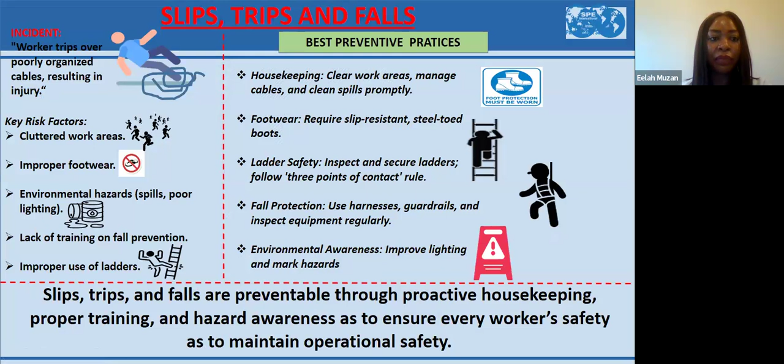As energy professionals, safety is in the forefront of all our activities, and continuing in that light, I'll be sharing a brief story that we could take some learning points from and integrate in our various workplaces to ensure that our safety is kept at the forefront. So I'll be discussing briefly an incident that happened on site.

A worker tripped over poorly organized cables, and this resulted in an injury. In response, an investigation was made to point out key causes of the fall and also to identify other key risk factors that could cause slips, trips, and falls while on site. It was pointed out that the slip could have been caused by cluttered work areas, improper footwear, or environmental hazards such as spills and poor lighting.

Also, from the investigation, it was pointed out that the incident could also be caused as a result of lack of training on fall prevention and improper use of ladders. After the investigation, some best preventive practices were put in place to take proactive steps to ensure no slip, trip, or fall happens again while on site.

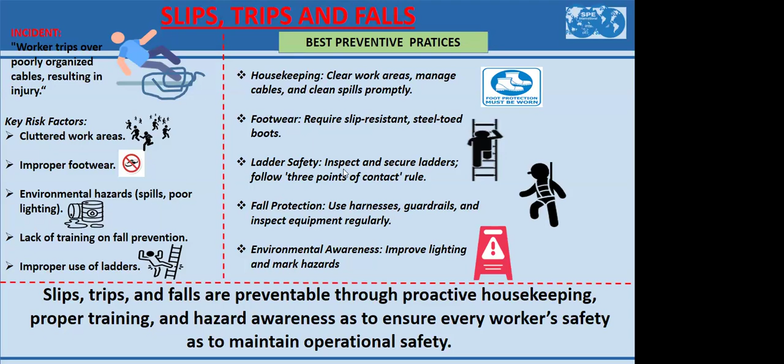Thank you, Carlo, for that very insightful safety moment. So indeed, slips, trips, and falls. Some of it may sound very light, but some of these incidences have led to injuries that are life-threatening, and some lead to injuries that people are impaired for the rest of their lives. So thanks for sharing. We cannot overlook some of these things that look like they are quite easy. Please, as we share these safety moments, if you have any addition or comment, put it in the chat box. Though we're managing time, it's also good that we're able to learn from each other. So thanks again, Carlo, for sharing that very important safety moment.

Okay, so we'll move over to a welcome address by the section chairperson, Sir Abiye Pedro.

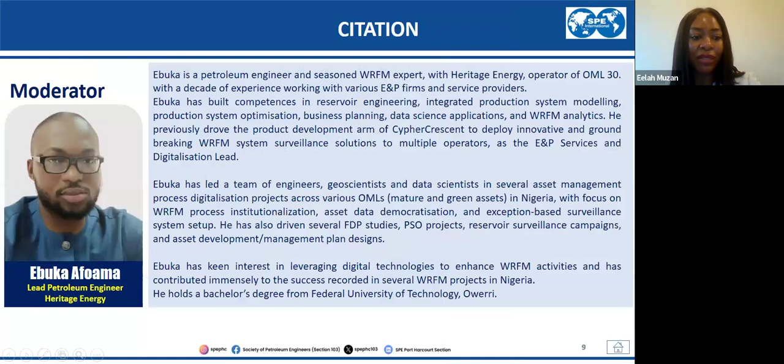All right, thank you so much, Eelah, and a very good evening, good afternoon, and also good morning, because I recognize that not all of us are connected from Nigeria. So good evening, good afternoon, and good morning from wherever you're connected to. You're welcome to this month's monthly technical meeting.

I'm particularly excited about this month's topic, because I think from what the section chair mentioned, our production from the Niger Delta is majorly made up coming from brownfield assets, and it would be good to hear and get learnings from a seasoned industry expert who will be sharing experiences on how we can increase production or optimize production from these brownfields. First by discussing some of the challenges, so that at least we're all aware of what the challenges are operating brownfields in the Niger Delta, and also what the opportunities are for us to improve and increase our production from these brownfields. Before we go into the presentation, I wanted to go through a bit of a process check. So the presentation will likely be for approximately 30 minutes, after which we'll go into the Q&A section.

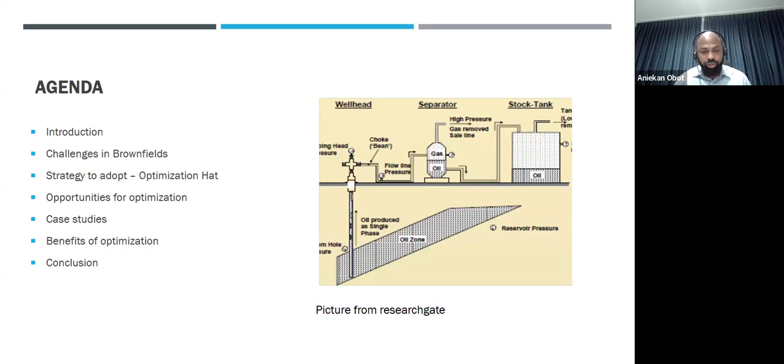If you go to the next slide, just to provide some introduction: in terms of brownfield, I think the quick question is, what is a brownfield? Typically, there are a few characteristics of a brownfield you need to take into cognizance. I looked that up because typically you want to call every field that is matured a brownfield, but there are clear things you need to pick out when looking at a brownfield.

One of them is that it must be matured. You must have had some production over the period. You've gotten data, you understand your reservoirs, you have some understanding of your well performance, and a bit of understanding of the limits of your facilities. So indeed, it's a matured field. Even more so, because it's matured, you also begin to see some level of decline, declining performance or declining production. That's just the general definition of brownfields.

So in that context, once you start having decline, you can actually be in the midlife or end-life state of the field. That's where you need to put on your optimization lever even more, because at that point the cost of managing the asset becomes very significant and the margins are very small. Because the margins are small, you need to take advantage of all the low-hanging fruits to make sure you deliver value to the business.

Some of the characteristics I've pitched are around aging facility. For example, you have fields that have been there for more than 20 years. Separators were also installed at the start of the production life of the field. Because of age, obsolescence, and environmental factors impacting the facility, you begin to see that your aging facility becomes more like a liability at some point, considering the maintenance cycles and all of that. So that's where you need optimization to actually help provide that context.

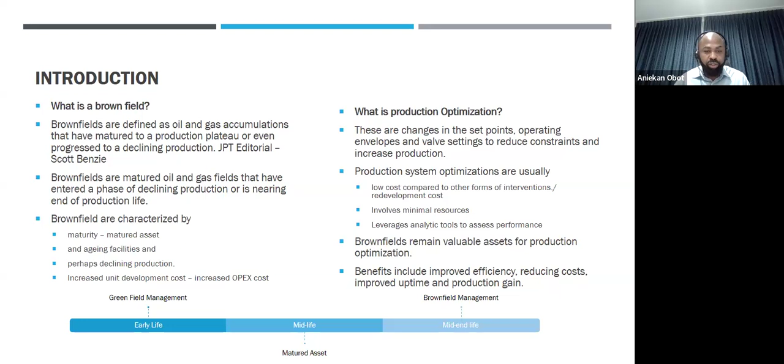If we go to the next slide, it tries to capture some of the challenges, not just peculiar to the Niger Delta, but also challenges across the oil and gas industry, right? And how you manage your fields. Some of them are around the reservoir as well, trying to put these in different buckets. But I really want to focus on the fourth option, which is around the challenges of the Niger Delta and how we can really push through that terrain and get the best out of it.

For the reservoir and the well side, you're already conversant with energy depletion issues, depending on the drive mechanism of the reservoirs. That's also very key. You now need to think about rock failure leading to sand production in your wells. There's also issues around uneven contact movement and uneven sweep across the reservoir. Those are things we also know fully well. There's also a bit around bypassed hydrocarbon and all of that. So I think that's about it on the reservoir side.

On the well side, you have the integrity issues. For a brownfield, integrity becomes very, very key because obviously you have things that could be failing in your wells. You have high BS&W issues, sand problems, GOR problems as well, looking at flare limits and trying to make sure you stay within GHG emissions. So those are some of the teething issues around the wells.

Liquid loading for gas wells, we've seen that clearly in some of the gas wells that we're doing. And then we see flow assurance challenges in terms of waxes, asphaltenes, and scales in our wells.

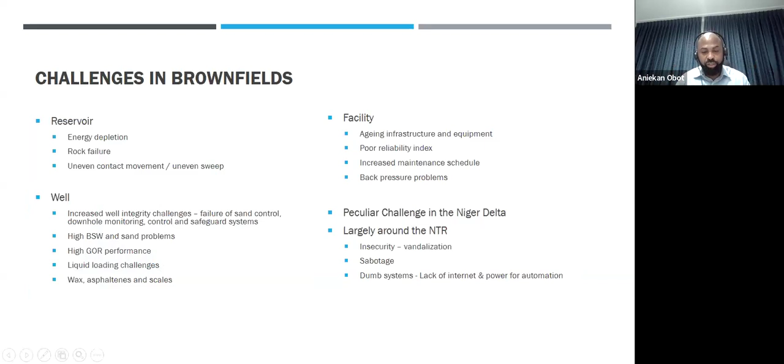Then if we move to the next slide, what we tried to do was reflect on some of the things we're doing and just to be able to put a strategy and a workflow to it.

Reflecting on that principle, I have to sit back and ask, in approaching optimization opportunities, how do we go about it in my team? One thing that stands out strongly is knowing your production system. Nothing takes away the fact that you know what you're optimizing—you're able to determine what's giving you the gaps, what are the challenges, and what are the constraints and limits to your production system. So the number one thing you need in optimization is to know your production system.

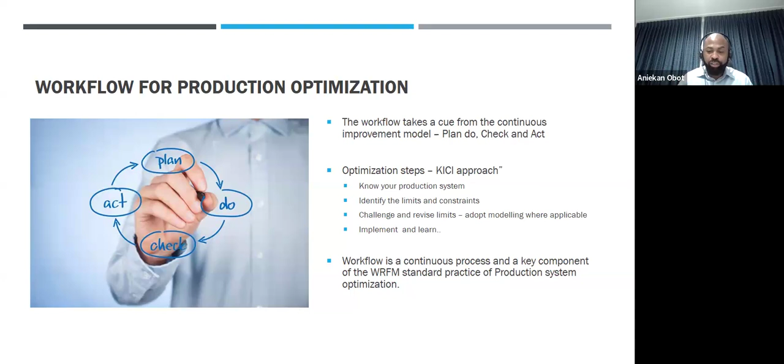If you go to the next slide, it basically tries to capture some of the tools that you use, and industry experts will reckon with some of these. One of them, very prominently, is the well operating envelope—a very simple diagram that captures a limit in just a snapshot, so you can begin to see where your well is producing and what the impact is.

Where can you optimize? Do you still have room to push your limits? What are your constraints, your soft and hard limits? That snapshot basically captures, from the well perspective, where your operating point is and what your operating window is for optimization. It's a very powerful tool.

If you're able to create that well operating envelope based on the well test for your wells and your field, you're going to deliver value and results in a very short term. The next bit, apart from the wells, moving into the facility space—there are two quick tools you can use to drive that. One of them is the IPSM model, which is a network model.

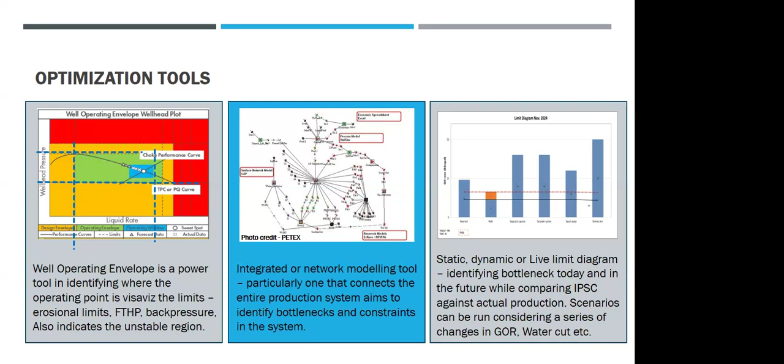I don't know how many companies use the PETEX model, but it's a network model, an integrated model that integrates both your surface, your well, and your reservoir. So it's a full view of what the network is, and you're able to really see what the bottlenecks are in terms of your production. This is a very fantastic tool. I'm not here to pitch the tool, but the key message is that you could leverage on some of these tools to help in your optimization journey.

The other bit is also the limit diagram. The limit diagram is also a very fantastic tool, and we've come to really appreciate the powerful insights that we draw from it. I can share some examples on the limit diagram where that has been able to give us the right value that we see. The limit basically looks at the dynamic constraints on your facility.

So that you're able to go ahead and debottleneck, go ahead and optimize, not losing sight of other pending constraints when you resolve the immediate constraint that you have. The insights you draw from the limit diagram are very, very powerful in the sense that you can actually build a limit diagram that speaks to the future, that looks at all your incremental activities that you're going to be doing in the field and what your constraints would be.

There are instances where your lines are not able to contain the rates at which you're producing your wells, and you become constrained. In that case, you can plan ahead. You can forecast how you're going to be able to reduce those limits, debottleneck, decomplexify, and also get the best out of it.

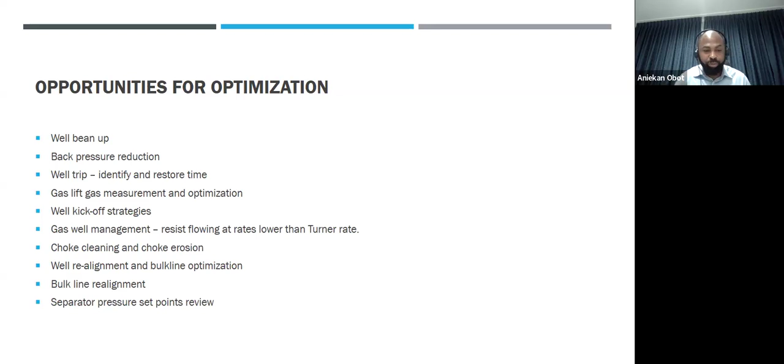If you go to the next slide, I have a few case examples, four of them, and then one that I'm also pitching. Maybe there are a few interested people that may want to take that on board. I think it's a great opportunity for us to build on that and really get production from that space.

This is a case study. There's an SPE paper that was published, credit to the team that published this. A few of them may be on the call, OE and the likes. It was a close team, and I was also part of that paper presentation at the SPE. This was the paper where we tried to capture driving profitability in brownfields by just focusing on how we optimize our well operating envelope.

Like I shared earlier, this is a very good tool in managing our well performance and production. It is not done in isolation - there's a bit of this that goes back into your reservoir modeling space, to see the impact of bean-ups and how that affects your overall recovery, because we're looking at longer term recovery from your wells, not just the instantaneous production increase. We're also looking at how it impacts recovery. So there's a second part to this tool which is very good, that you need to cycle back to your reservoir engineer to see the impact in the overall recovery space.

But one thing that is very pertinent is that as you do your well test, you get more insights, more information, and you're able to plot your well test and begin to see how that's changing over time. I'm going to say, can I push my limit a little bit by increasing my bean by 10% or 15%? And that can actually help you gain some production in that space.

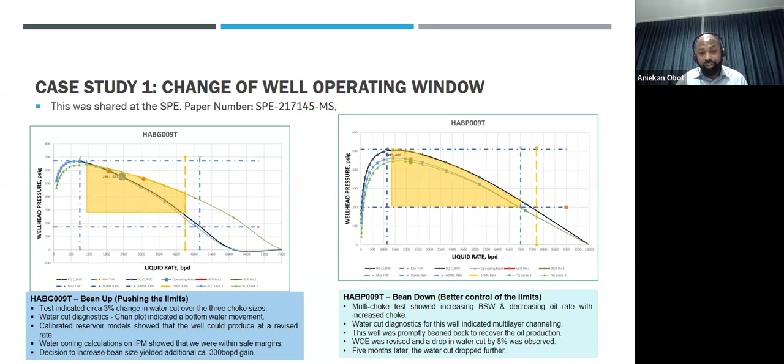This was a clear example where we had done the bean ups, got the instantaneous gain, but it wasn't sustained over a long period. We had to go back and review that, and we were able to bean back. Over the period we had water cut drop, which meant we had some more incremental gain in oil production from that well. So this is one very easy tool that you can quickly adopt to understand the well and go after the minor opportunities you can get from here. Cumulatively, this initiative was able to unlock roughly 10 to 12,000 barrels of oil per day across a set of fields over a big asset, just by optimizing our set points.

The reality of oil production - even in the oil space - is that you're often producing through a 2 3/8 or 3.5 inch tubing in some scenarios, and you're also limited by the size of your tubing. The tubing size you're running may have been set by a field development plan that estimated you don't want to go above a certain rate. But as your wells move into that weak region, you want to create less frictional impact, and you're able to deploy this as an incremental opportunity. What we're seeing is that you get something higher - you may not get 2 times what each string would give individually, but you get something incremental on top of the base production from one of the intervals.

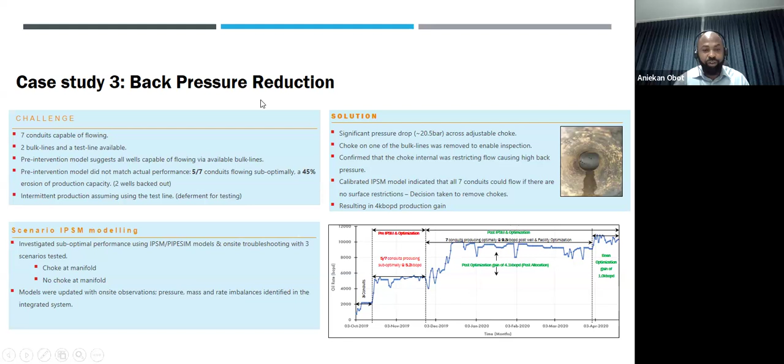Clearly a good opportunity, but you also need to take into cognizance that there could be some deferments if you want to test the wells or if you don't understand the performance. A lot of the time you'll be doing bulk testing, so you may take some deferment to do individual dedicated testing, to understand well performance and even determine weight factors for your hydrocarbon allocation.

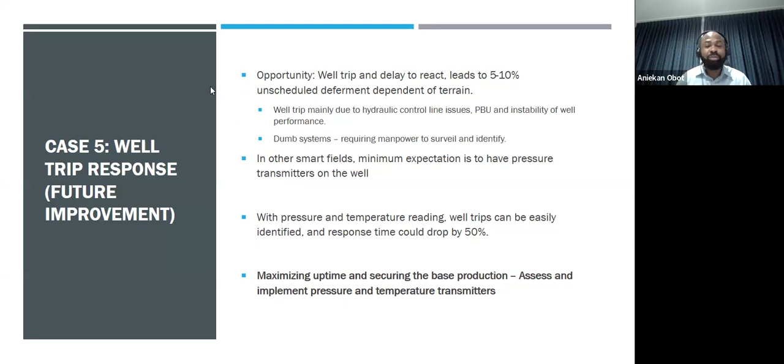In conclusion, I think production optimization is a clear lever. I think we all agree to that. And adopting the right continuous improvement mindset is important in this journey. For us in the Niger Delta, I think it's a huge opportunity because a lot of our reservoirs are still giving, they're still giving a lot of production, and you see that when you look at the field performance, the production performance of your fields, they are still giving. So there's a lot more that we can tap from the wells by just increasing our efficiency, driving our optimization, putting optimization at the forefront of our day-to-day work, and beginning to see how we can change the game.

So for brownfield and late-life fields, it's an opportunity to extend it even longer and make it more profitable by spending less, reducing OPEX, and looking for all the low-hanging fruits that you can actually tap into. At the end of the day, we generate cash and reduce OPEX, right? And that's an opportunity for all of us. So I think I want to round up at that, on this point.

Happy to take your questions, and I want it to be more of a discussion because, like you know already, it's a learning process. I've shared insights from the Niger Delta, I've tried to tie in some of the easy things we can pick up from my experience in the UK and even in Brunei. I think there's a huge potential for all of us in the Niger Delta to actually push the limits of our production for our different companies and different stakeholders. Yep, thanks, and I hand back to Ebuka.

Oh wow, thank you so much, Mr. Aniekan. I think we deserve a virtual round of applause for doing justice to this topic. Thank you so much. Thank you.

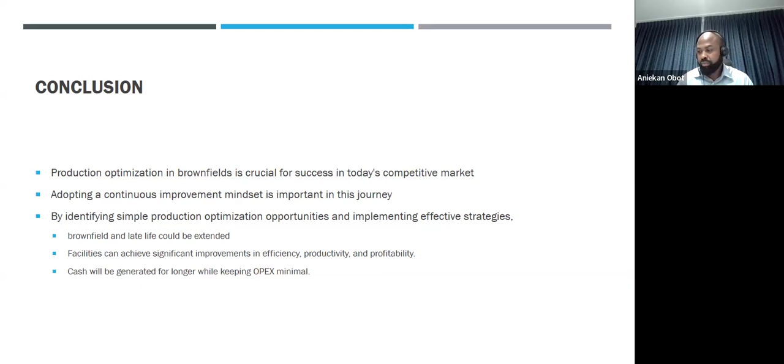Delivering this topic, I think you started clearly by firstly giving the background, what exactly are brownfields, and we're referring to mature assets. And even though these assets are mature, you also gave the background that these assets are still critical to the production that we have from Niger Delta for a number of companies. Because a lot of the assets we're dealing with, especially in Niger Delta, are decades old, 40 years, 50 years old, so we're dealing with a lot of mature assets. But that doesn't mean that we will let the assets lie fallow or allow the production to keep declining. We have to keep optimizing production from these assets.

And then you went on to really bring out what exactly is production optimization, especially in the context of today's discussion, and that is focusing on low-hanging fruit. I think that was a key point for me. Low-hanging fruit, not the big interventions, new drills trying to increase production from these assets, but what are those low-cost initiatives that probably don't even cost up to tens of thousands of dollars at most, that you can implement to still increase production from these assets.

And then you went on to share that production optimization generally, if you want to summarize it into one acronym. Thank you for sharing the acronym. It is KICI. Is that KICI or KIKI?

KICI. And it's all about continuous improvement. So first, know your system. Understand your system very well.

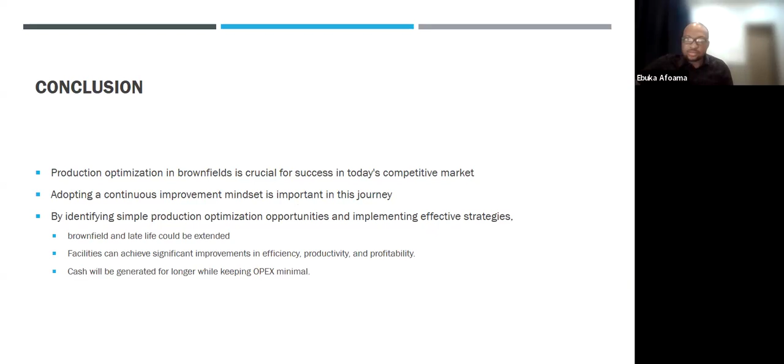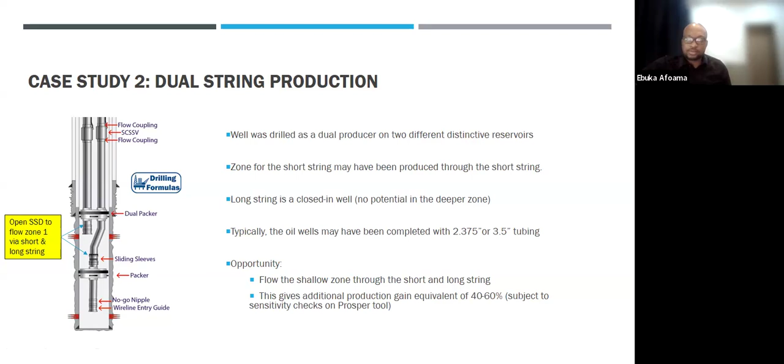If you go back to the diagram, what you're doing is optimization on your vertical lift performance, while sand production remains intact, as it was initially when producing the well to the short string. Looking at the zones, you may have deployed IGP, but it wasn't treated at that point, so you have untreated sand. Based on sand failure predictions, you may not have sand problems now or in the future. In this case study, we're demonstrating that you can push the boundaries of vertical lift by opening flow from the 2 strings. If sand is a concern, there are chemical and mechanical technologies to manage it across that zone. But here, we're emphasizing that you can open the zone on the long string and tap flow from zone 1 across both strings. If vertical lift is a challenge, you can get additional production by opening that sleeve, especially when the long string is lying fallow as a closed string you're not using. That's the emphasis for optimization in case study 2.

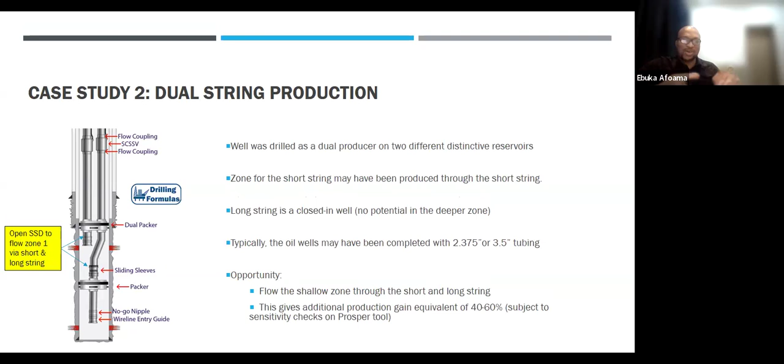When optimizing dual zone production using a single string — and in the second question, you're also commingling production from two different reservoirs into a single flow line — what strategies are employed to prevent the higher pressure zone from limiting production from the lower pressure zone, because you have to deal with that particular issue. And what are the potential consequences of back pressure on production? That's why I'm combining the two case studies, case study 2 and case study 4.

For me, case study 2 is very easy and straightforward, because it's the same pressure, the same well — it's just going through two different strings, right? So you don't have any back pressure effects in that case. The only thing you might worry about is what flow regime you'll be expecting from both of them, and you can always manage that with your choke at surface to optimize the flow regime, because you don't want your well to be slugging. So you need to find a way to manage it. If you have good energy, you can see flow from the two strings and you're fine. Cumulatively, what you're going to get from the two strings would give you something higher than what you'd get from just one string. So you have the other string that's not doing anything — you take advantage of it and get it to produce. In that case, no back pressure. What you have is just production from the two strings, same reservoir, same molecule going to surface, but you're getting incremental volume because you're opening the other string.

On the other case, case study 4, I'm really keen on that because that was also one of the key things we put into consideration in managing case study 4.

If you go back to that slide, I tried not to put in a lot of details because of the presentation, but one of the things we use is the network model, the IPSM. In that case, we're able to bring in two of the zones and begin to test the impact of one zone on the other. Sometimes the impact may not materialize in the short term, so we need to build in the future bit by running prediction. However, we have a mitigation to manage that space.

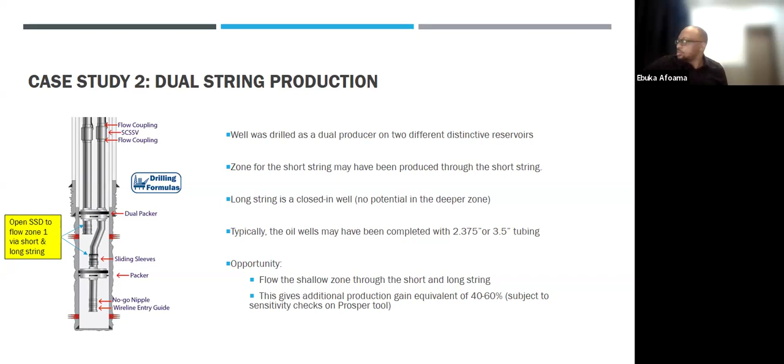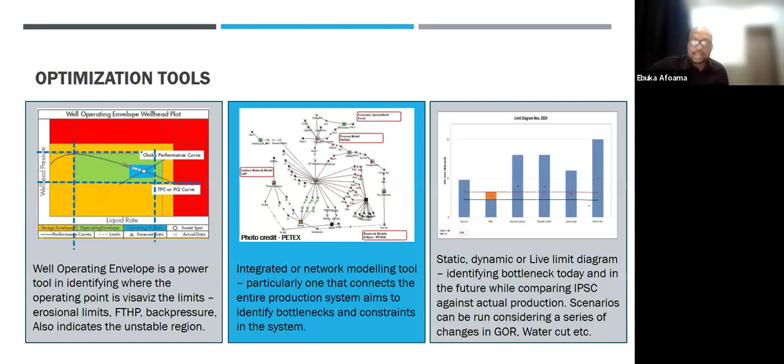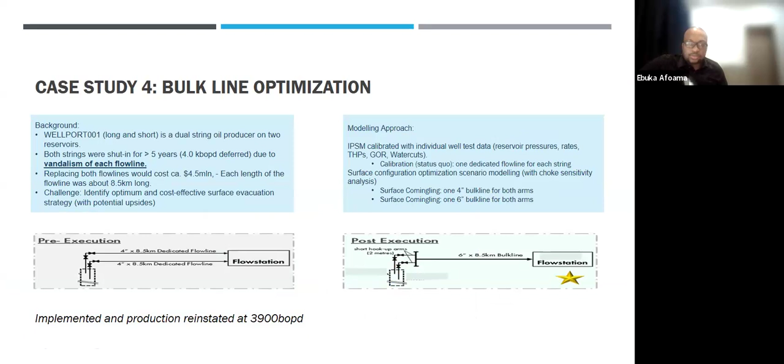If you look at that diagram, go to slide 4. I just want to show something quickly. You see that the bulk line we're optimizing is downstream of the wellhead of the two wells. So the two wells have a short length of line coming from them. Case study 4, I think that's the slide, slide 11. So you have the two flows. This is the picture: the optimization is a small length of flow line coming from the two strings, long string and short string, and on that short length you have the choke on each of the strings.

With the choke, what you're trying to manage is the pressure downstream of the choke. If you model your well and put the choke at 30, 32, 33, it changes your flow line pressure immediately after the choke. That's how you determine your choke setting, because you want to maintain sonic velocity across the choke so that downstream interferences don't affect your upstream. Once you put a choke across it, you're able to determine your flow line pressure immediately after the choke. What you intend to do in this solution space is make sure that your flow line pressure between the two strings are within the same regime.

Roughly 5% difference is still okay. You're going to get bulk production across it. You may not be able to derive 100% of the production from each of the strings combined. For instance, two of the strings were doing roughly 2,300 and 2,200, 2,400 or 2,500, but we ended up with 3,900 as the bulk production from there.

This gives you value when you look at it in terms of cost over benefit, because now you have a single line, you can always flow the well, and you can optimize even more by knowing which well is giving you more liquid or more oil than water. You can use your choke to vary which well gives you more production at the end of the day. This was a clear example of saving costs in the short term and managing in a longer period by also using the IPSM model to test scenarios on different flow line sizes to see how you're able to reduce back pressure effects.

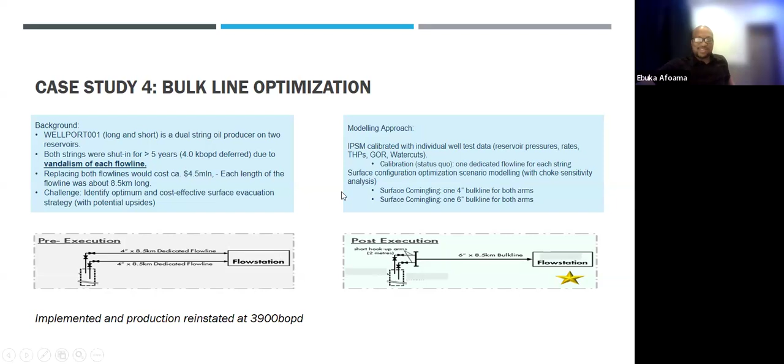Thank you, Ebuka, and thank you, Nyekan. It's obvious that we can spend the rest of the evening here if we allow both of you and also our audience. There's a lot of interest because WRFM is so wide and far-reaching, we can discuss from the reservoir to the facility. There's so much to talk about. So thank you very much, and we must appreciate both of you. You have delivered on your duties, both as speakers and moderator. Excellently done. So thank you again for taking the time and sharing your experience.